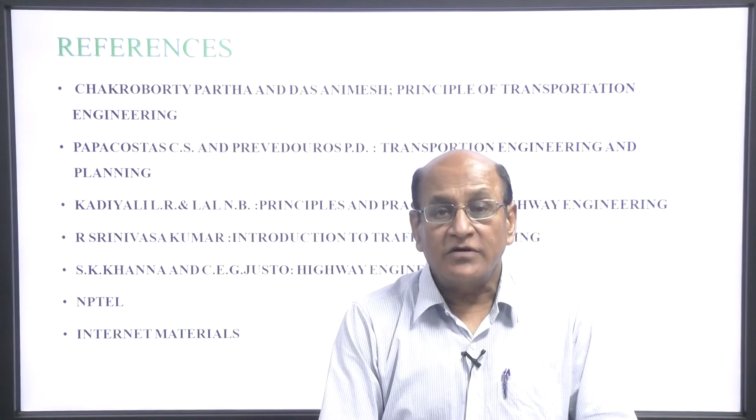References we have taken: Chakroborty Partha and Das Animesh, Principle of Transportation Engineering; Papacostas and Prevedouros, Transportation Engineering and Planning; Kadiyali and Lal, Principles and Practices of Highway Engineering; R. Srinivasa Kumar, Introduction to Traffic Engineering; S.K. Khanna and Justo, Highway Engineering. Some material have been taken from NPTEL and internet.

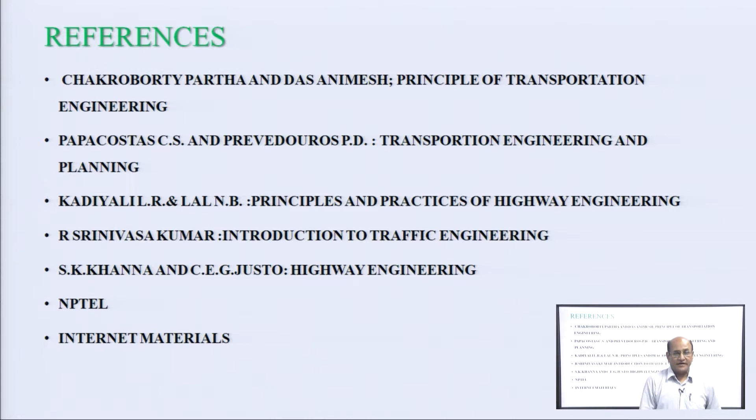The contents today we will cover: land use and land cover, land use, accessibility, mobility, land use and transportation interaction, Hansen accessibility models, density saturation gradient method. So we will take up one by one.

Continuing from the previous lecture on land use and land cover. Land use planning is required to predict the spatial organization of population and economic activity in the region.

Land use models serve two distinct purposes: first, forecasting total activity of an urban area; second, allocating these activities among the predetermined set.

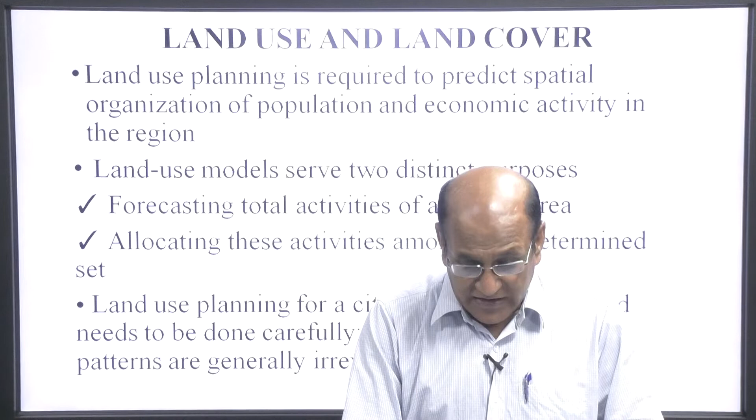Land use planning for a city is a complex task and needs to be done very carefully. Changes in the land use pattern are generally irreversible.

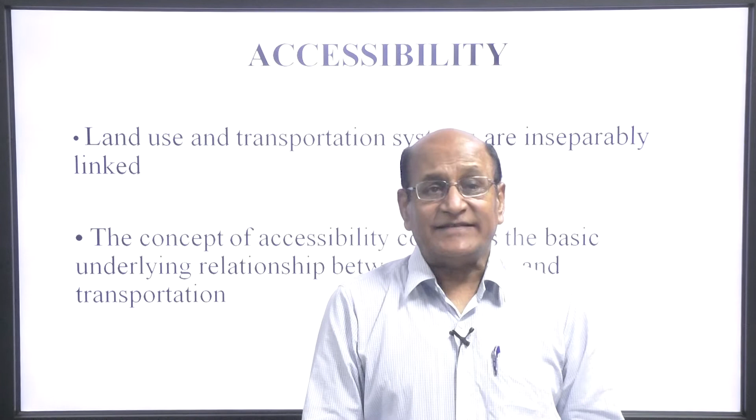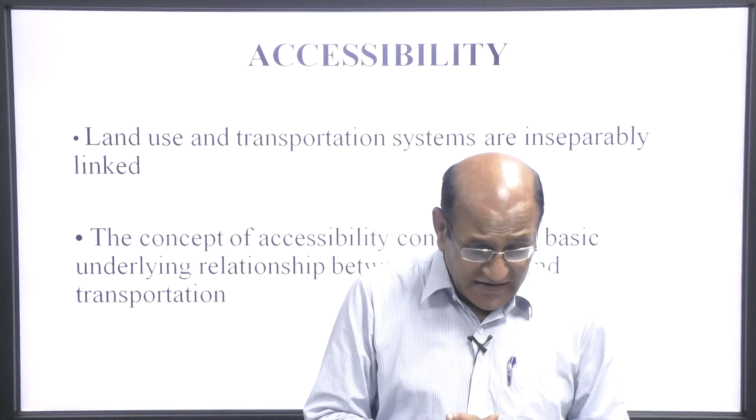Now come to accessibility. Land use and transportation system are inseparably linked. The concept of accessibility considers the basic underlying relationship between land use and transportation.

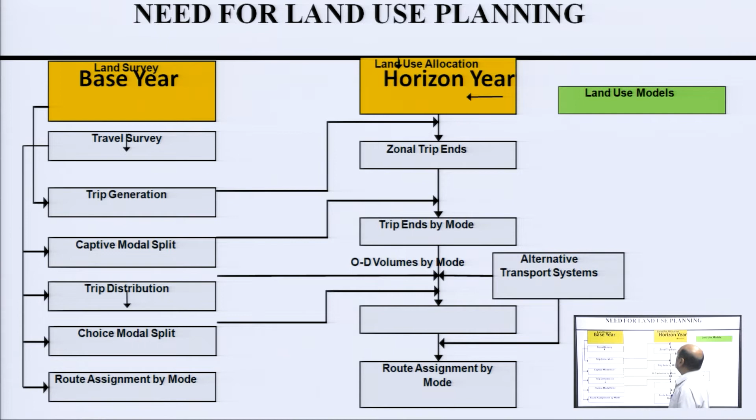So what is the need for land use planning? We have discussed this in an earlier lecture also. We can see here in this line diagram, this is the base year and this is the horizon year.

First includes land survey, then travel survey, trip generation, captive modal split, trip distribution, choice modal split, route assignment by modes.

We can see here in the horizon year, this will include zonal trip ends by mode - this is your origin and destination volume by mode. This will be contributed by alternative transport system, and finally the route assignment by mode.

So this is the picture which clearly shows why land use planning is necessary.

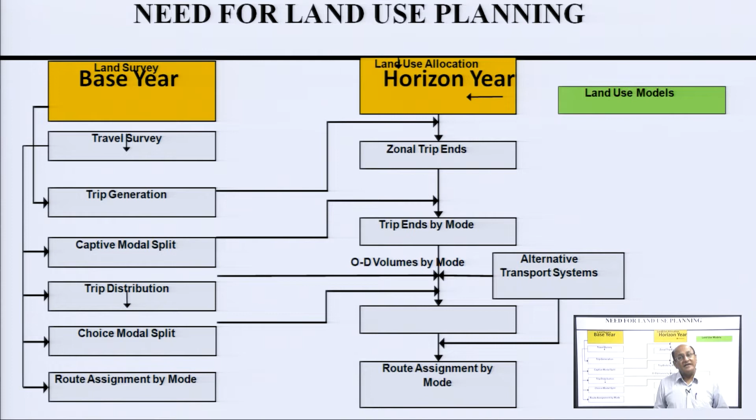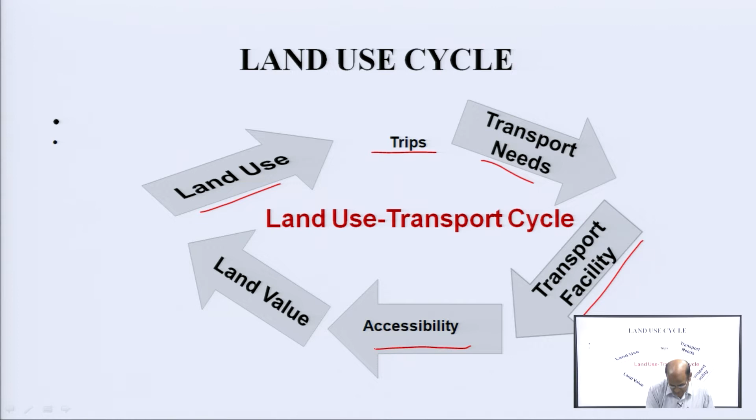So accessibility refers to the ease of movement between places. It indicates a spatial relationship or a degree of connection between one location and all other locations in a region. Accessibility increases, either in terms of time or money, when movement becomes less costly.

Also, the propensity for interaction increases as the cost of movement decreases. This is inversely proportional.

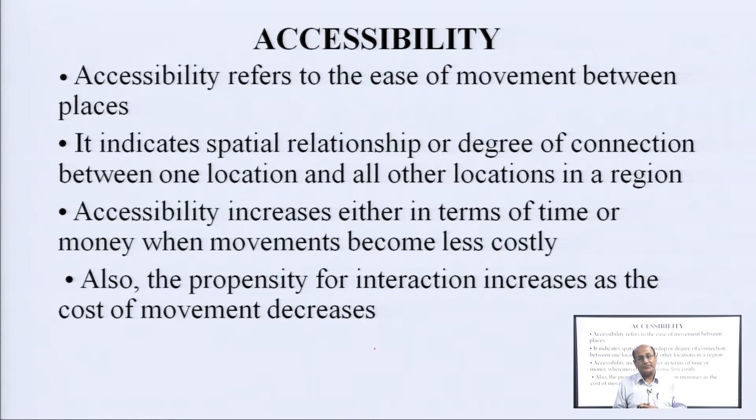Now come to mobility. Mobility is the ability to travel from one place to another in the urban area, associated with a particular group of urban residents. This indicates the ease with which a person can move out, depending on the performance of the transportation system and the ability of an individual.

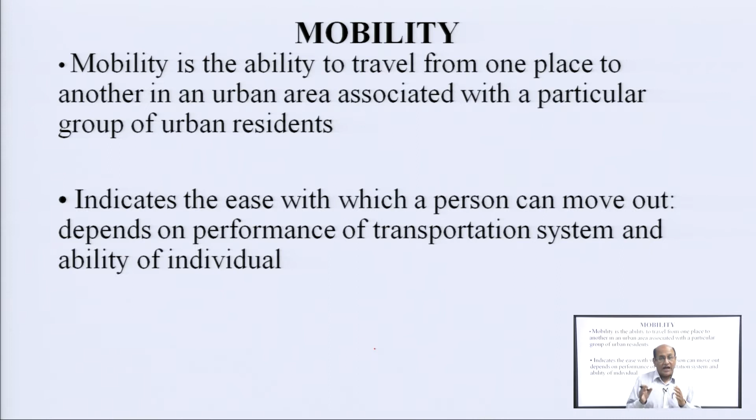This could be measured in terms of trips made by all modes - all modes are considered for mobility. Availability of different modes gives some indication of the resources one can spend on travel.

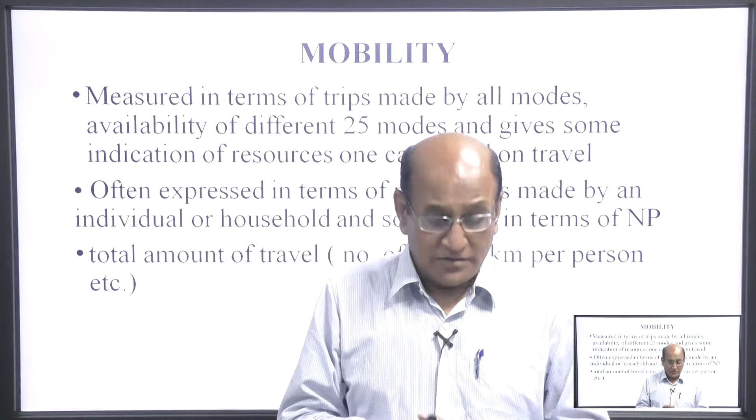Often expressed in terms of number of trips made by an individual or a household, or sometimes in terms of the total amount of travel, number of annual kilometers per person, etc. So this is mobility.

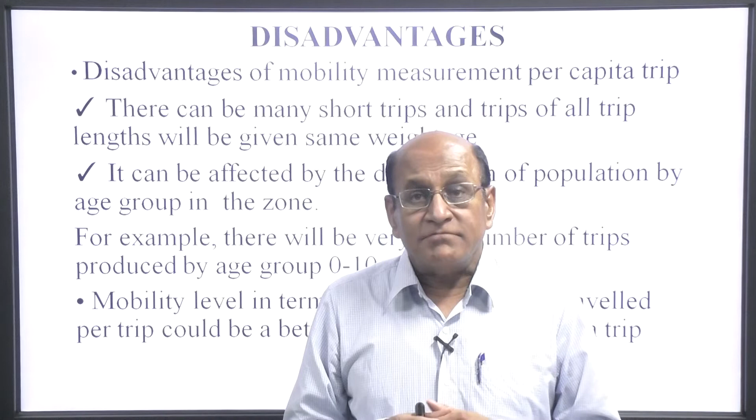What are the disadvantages of mobility measurement per capita trip? There can be many short trips, or trips of all trip lengths will be given the same weightage. It can be affected by the distribution of population by age group in the zone.

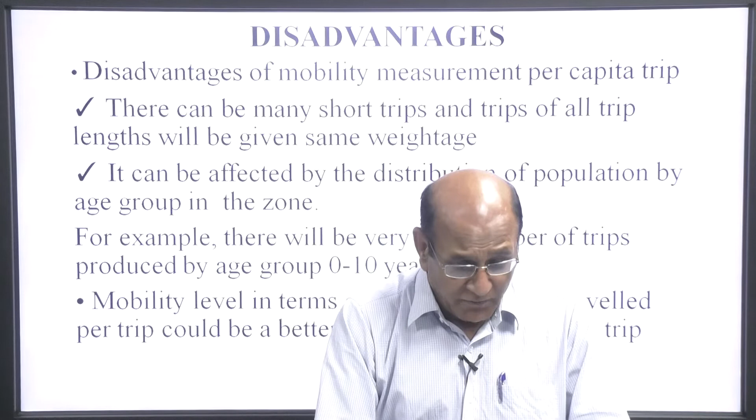For example, there will be a less number of trips produced by the age group of 0 to 10 - infants of 0, 1 or 2 years are not able to make a trip. Even at 10 years old they have very limited trips, just going to school etc. So the mobility level in terms of average distance travelled per trip could be a better measure than per capita trips.

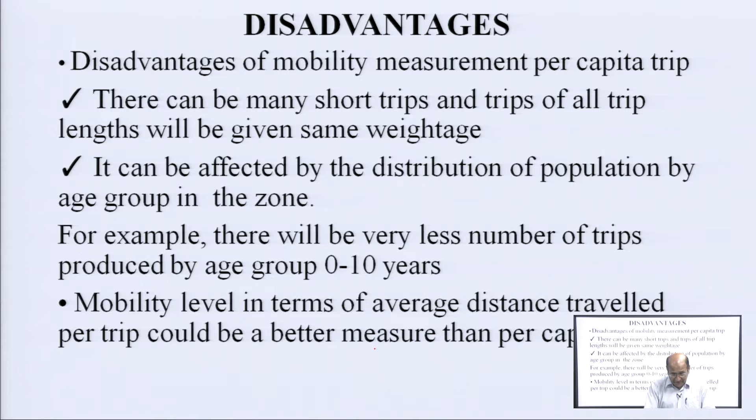So, when mobility is expressed as a distance traveled, it is found that as the accessibility index increases, the mobility decreases. This is important. Hence, distance traveled is not actual mobility, but is a measure of mobility need.

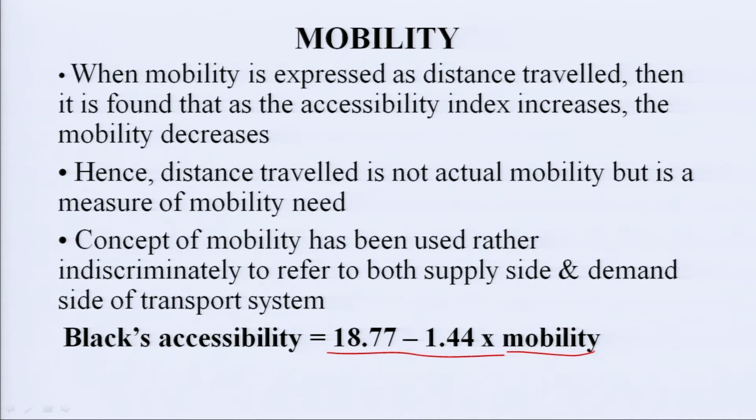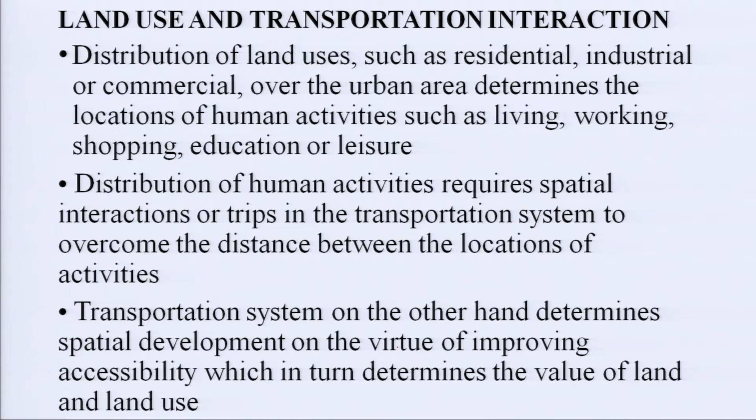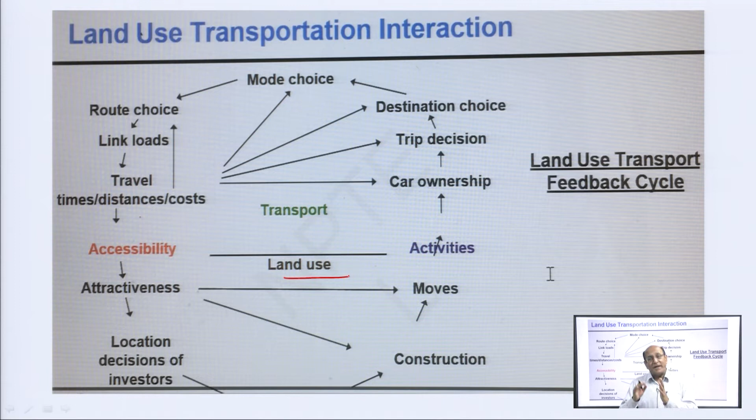Now come to Hansen's accessibility model. Hansen demonstrated that the location with good accessibility had a higher chance of being developed at a higher density than the remote location. Designed to predict the location of population considering employment as a predominant factor in determining the location.

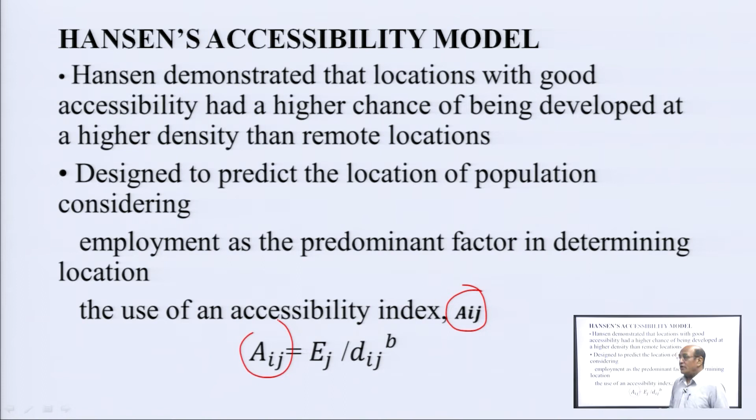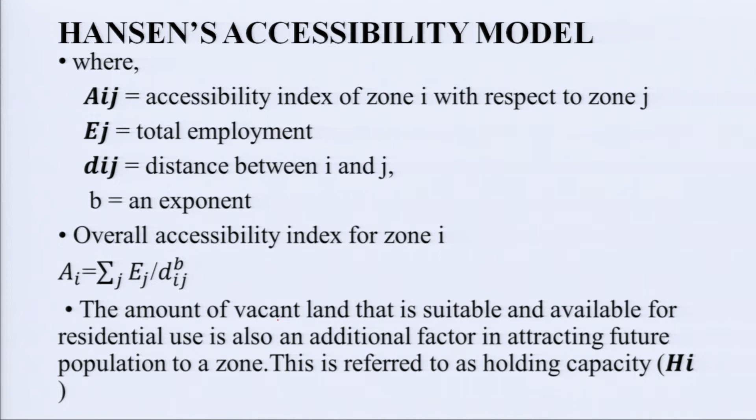The use of accessibility index, that is AIJ, AIJ will be equal to EJ divided by Dij to the power B. Where AIJ is the accessibility index of zone I with respect to zone j. EJ is the total employment, Dij is the distance between I and j, B is an exponent. So overall accessibility index for zone I will be equal to AI, equal to sum over j, Ej divided by Dij to the power B.

So the amount of vacant land that is suitable and available for residential use is also an additional factor in attracting future population to a zone. This is referred to as holding capacity, that is called HI. This is the holding capacity.

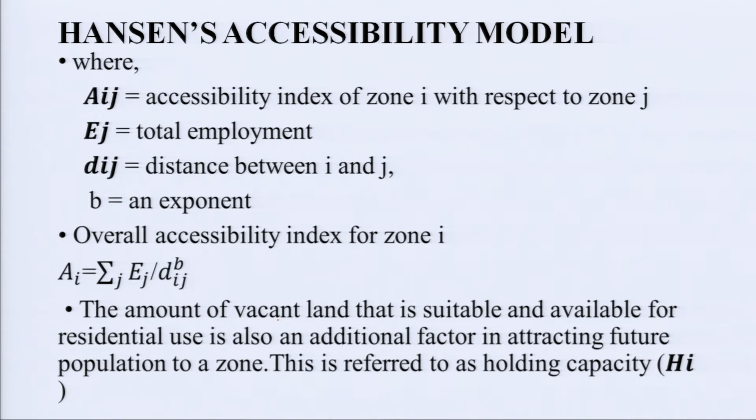The development potential of a zone Di will be equal to Ai into Hi, where Hi means holding capacity. The population is distributed to a zone on the basis of the relative development potential, so the potential is Ai Hi divided by sum over Ai Hi.

If the total growth in population in the future year is Gt, then the population allocated to zone I, Gi, will be equal to Gt Ai Hi divided by sum over Ai Hi, or Gt Di divided by sum over Di. So this is the population allocation for zone for the total growth in population in the future.

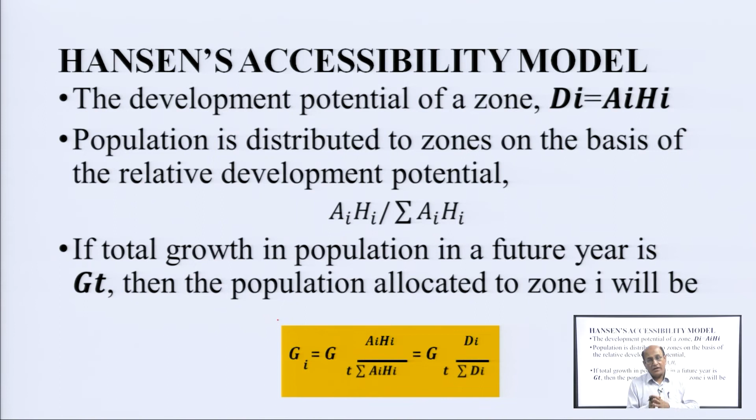So this is the Hansen accessibility model. We can define this accessibility model in this way.

Now come to Putman's model, because land use is based on different models depending on the location of the urban area and the location of the country. So it is a locational model that forecasts residence and workplace.

Ni will be equal to sum over j Ej Pi by j, where Ni is the number of persons living in zone I, Ej is a person working in zone J, and Pi by j is the probability that a person working in zone J would choose to live in zone I. So that is the human behavioral aspect of the user.

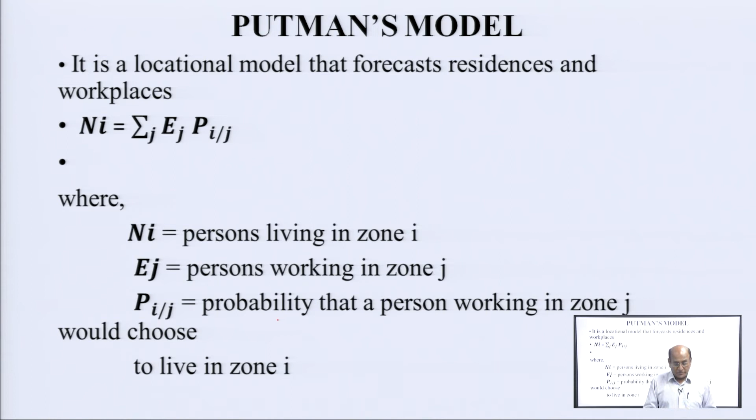So Putman's model goes on. Pi by j will be equal to f(Ci by j), where Ci by j is the cost or time of travel between I and j. So f(Cij) will be equal to Cij to the power minus alpha divided by sum over I into Cij to the power minus alpha, where alpha is the cost sensitivity parameter.

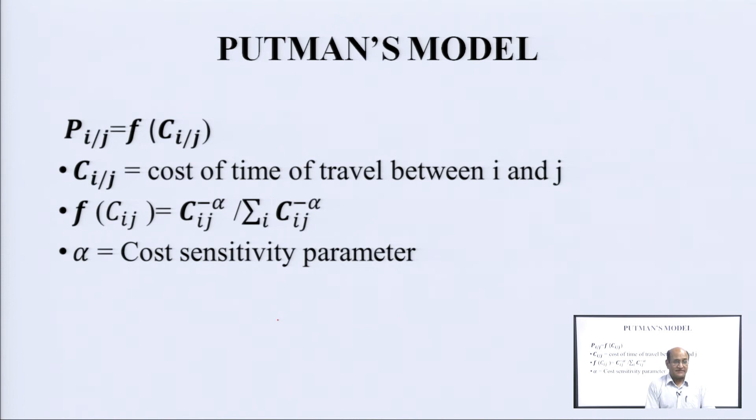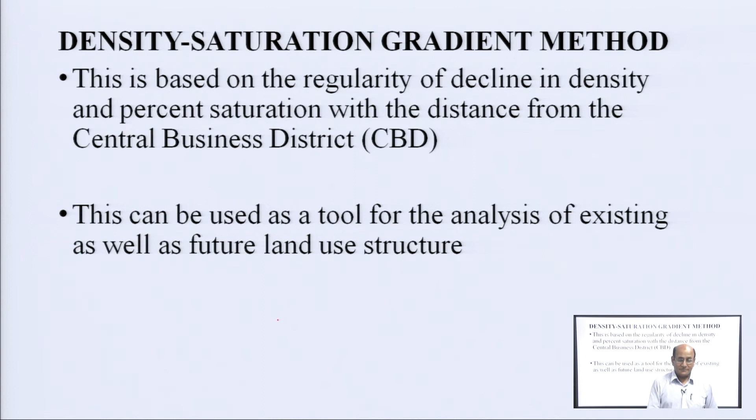Now come to the density saturation gradient method. This is based on regularity of decline in density and percent saturation with the distance from the central business district, CBD. This can be used as a tool for analysis of existing as well as future land use structure.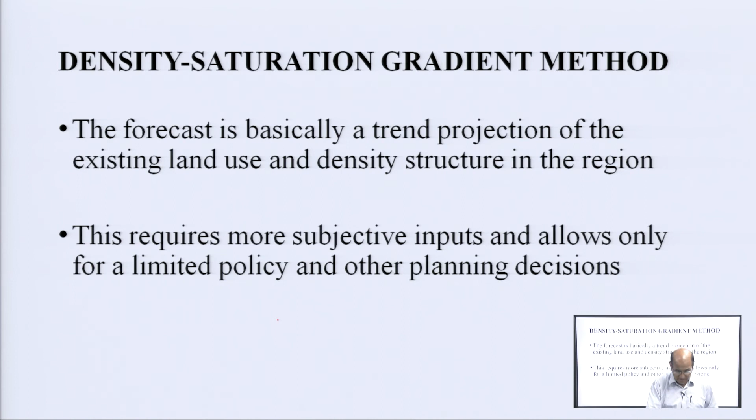In the density saturation gradient method, three empirical rules are used. First, intensity of land use declines as the distance or travel time to CBD increases.

Suppose in Lucknow, the CBD or center of the city is Hazratganj. The density of population or activities is more near Hazratganj. As we go out on the outer side or away from Hazratganj, the density of population or activity will reduce. So the intensity of land use declines as the distance or travel time to CBD increases. If the travel time is more, the density will be less; if the distance is more, then the density will be less.

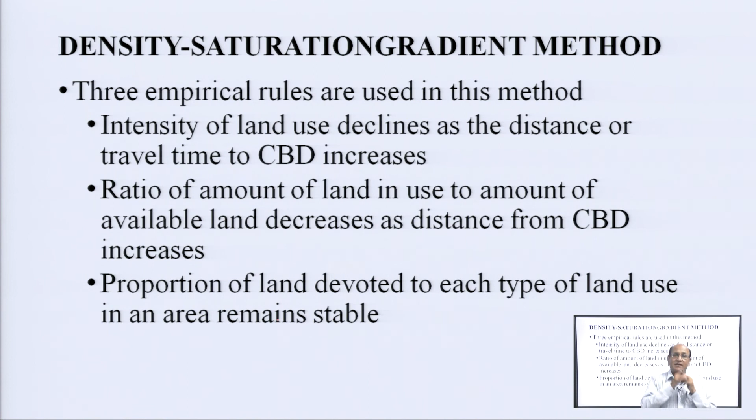So we can see here the density-distance relationship is given by dx will be equal to d0 e to the power minus bx, where dx is population density at a distance x from the city center, d0 is the central density as extrapolated into the CBD of the city, and b is the density gradient or slope factor.

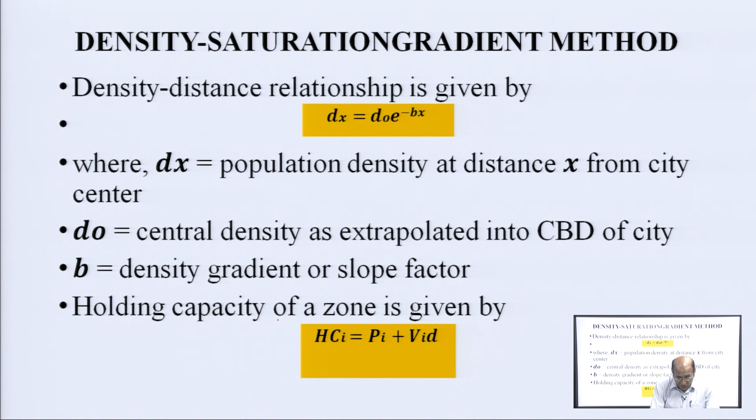Holding capacity of a zone is given by HCi will be equal to Pi plus Vi D, where HCi is the holding capacity of zone I, Pi is the existing residential population of zone I, Vi is vacant, available and suitable land in zone I, and D is the anticipated average density at which all future residential development will occur.

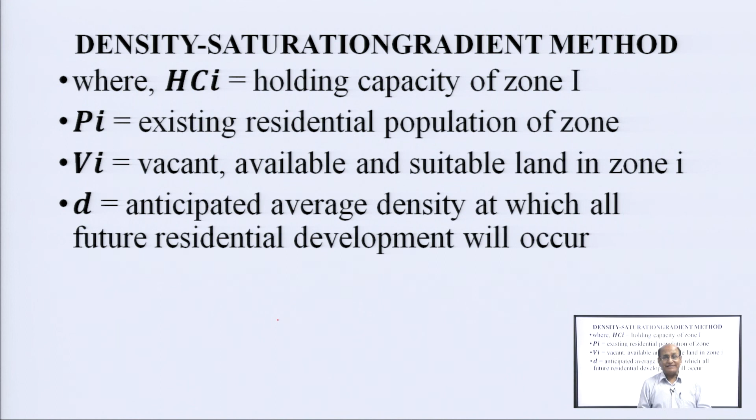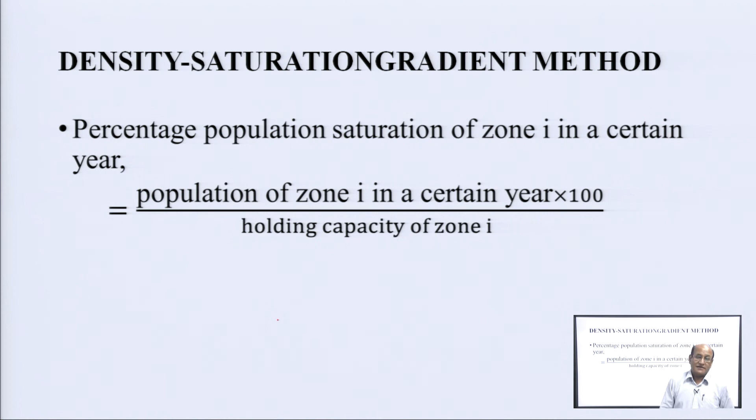So in the density saturation gradient method, the percentage population saturation of zone I in a certain year will be equal to the population of zone I in that year multiplied by 100, divided by the holding capacity of zone I. So we can calculate the percentage population saturation of zone I.